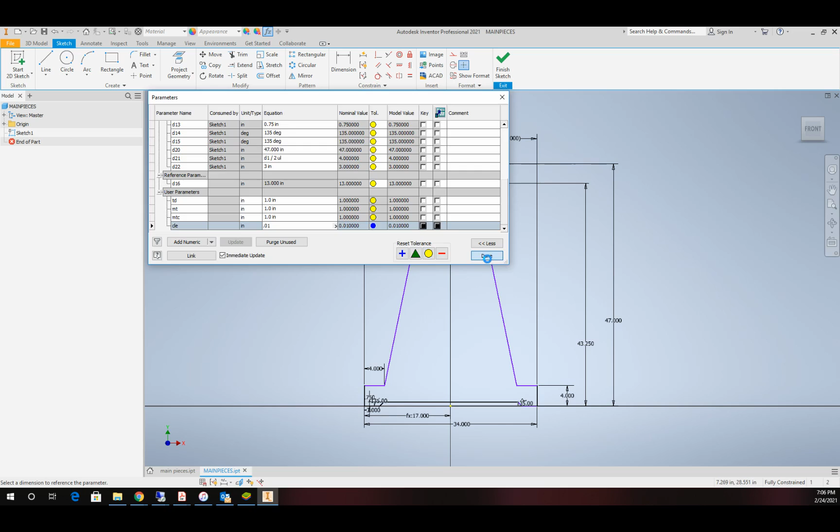I have the basic shape laid out here, and I'm going to try and keep this as quick as possible so we can see the payoff without wasting a lot of your time. So we'll do the back and the two sides, or something along those lines, and get ourselves going.

I have this fully constrained at this time, but I'm going to come in here and edit some of these. This is going to be a slot, so I'm going to call that MTC. And then I'm going to call this 2 minus CLE, since I know I'm going to have 2 inches on each side... actually, I take that back — no, we'll go ahead and do that. Then I'm going to take this, which is my slot, and set it at 4 plus CLE, and since we want two of those, we're going to go 4 plus 2 times CLE.

All right, so now it should be equal. I can double check by throwing another dimension on here just to confirm it looks the same, and it says it's a driven dimension and they match, so that is good. So now this slot is in perfect shape for where I want it to be at.

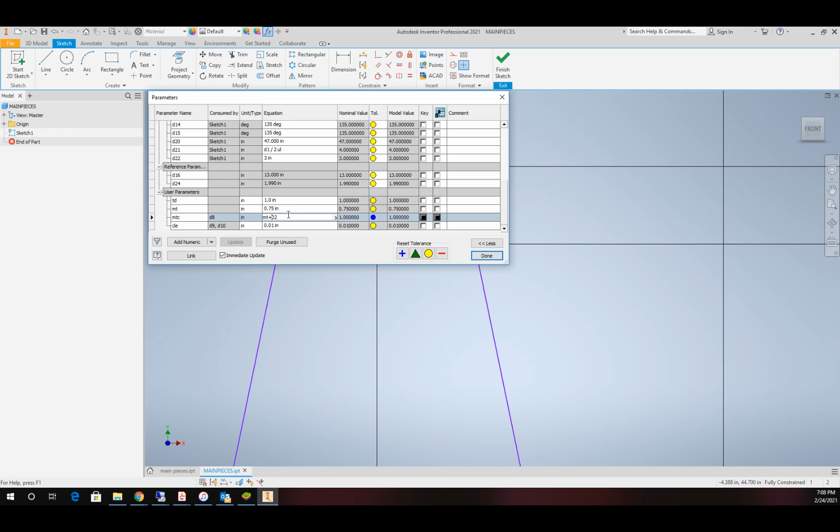All right, so that's better. Everything looks right now. Okay, so now I've got my first piece made, and I'll add some more features to this. As always, we want to try and keep our sketches as simple as possible and just have more sketches.

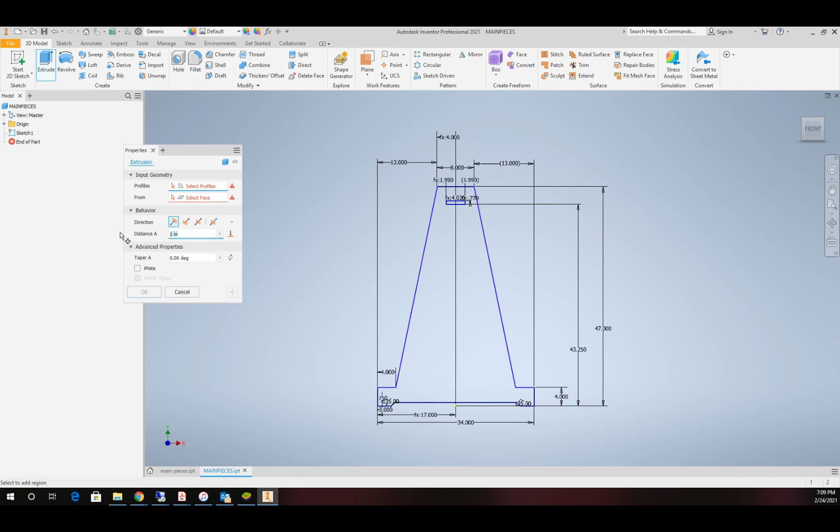So we'll go ahead and finish that up, and then we'll extrude it at material thickness. From there, I need to add a few other features in here, so I'm going to start another sketch on here, and on this sketch I'm going to go ahead and draw some rectangles in.

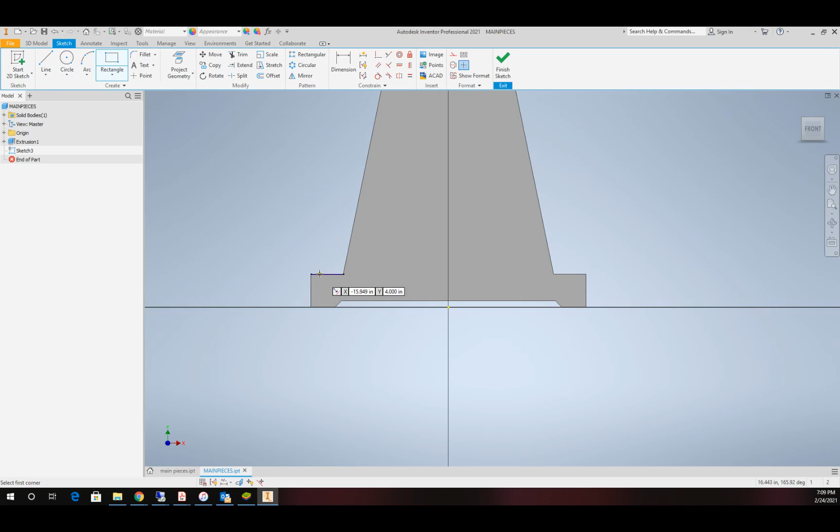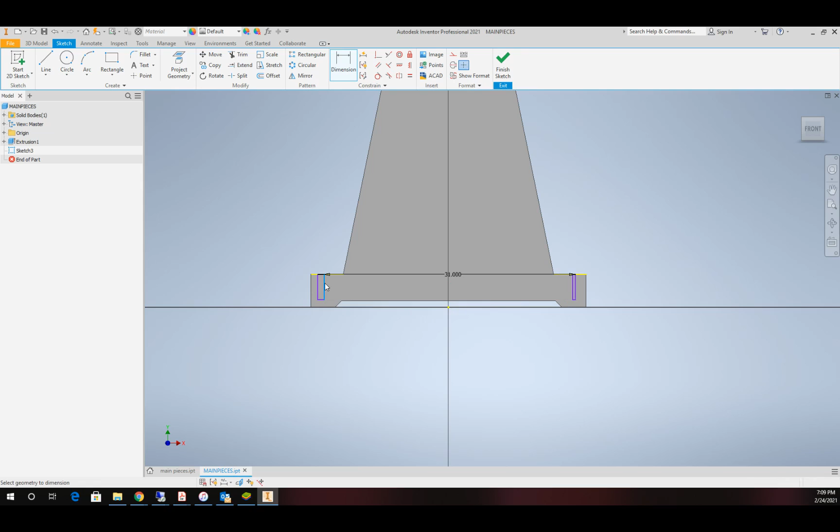And I'm going to make those equal to each other, so I only have to put dimension on one side. I'm going to place the dimension across, and that's going to be equal to 31 inches. Then I'm going to put one from here to the center, and we'll split the difference. Okay, that takes care of that.

This is a little wonky. Let's fix that. Okay, all right, and we'll just go ahead and set this equal to this. All right, and then we'll set a dimension here for our depth.

This one I don't need to get too sophisticated with, so it'll be 2. And then I'm going to place a dimension across it, and rather than using a number, I'll call it MTC, material thickness plus clearance. That should update that one as well.

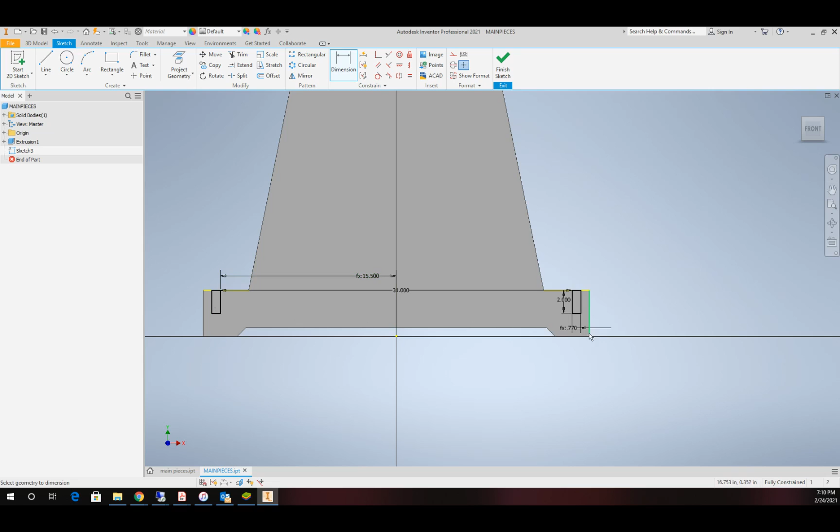All right, so we've taken care of the notches in there. We'll finish that off, and we'll extrude those as a cut. Like so, and now we have our notches cut to take the side pieces.

We'll add more geometry in here, but to keep this thing moving along, I probably won't finish it all for you. I may take a break and come back and show you it all finished up, but I want to make sure I get all these features covered.

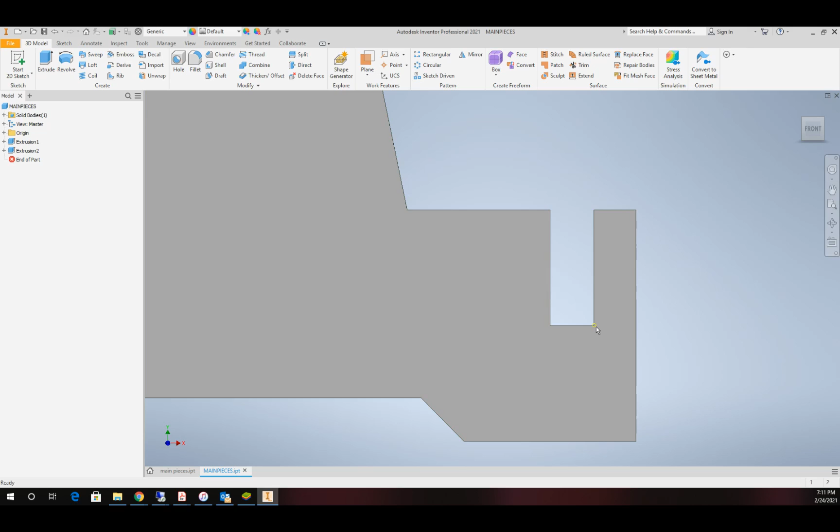Let's go ahead and add in - when we take a router bit or any cutter, we need to take into consideration we can't make a square corner. So we have an issue down here, so I'm going to start another sketch.

Now normally I do all these in a single sketch on all of my holes, so we'll just do the set that we have. So I'll start a sketch up there. I'm going to draw a circle, and I'm going to give it a diameter of TD, our tool diameter.

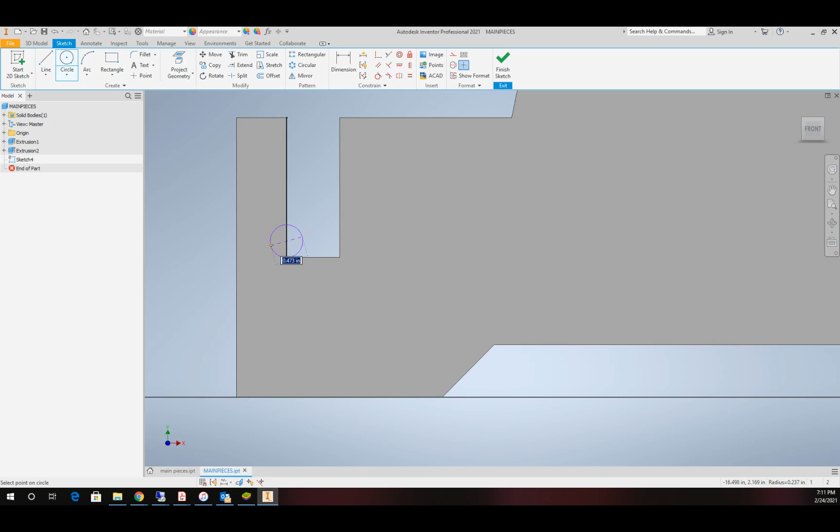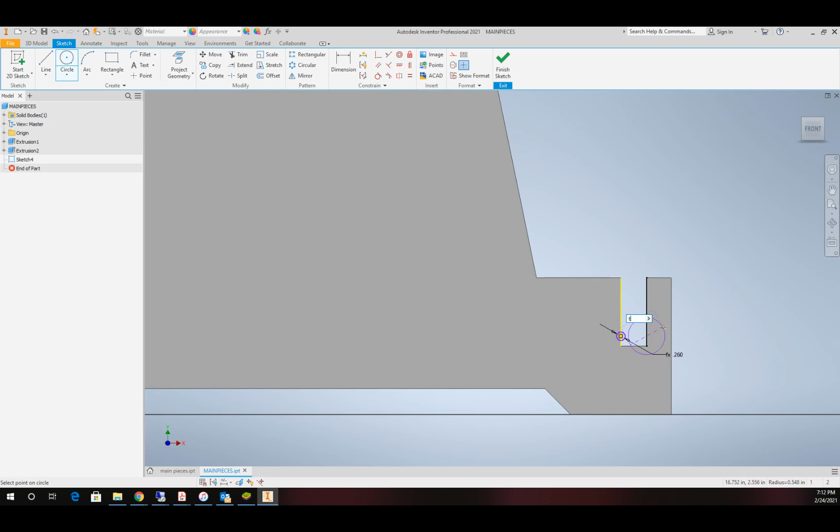That's too big, so I must have messed that one up. And it is - it's set to 1, so let's update that to 0.6. Okay, fixed, and we'll continue doing that. So TD, and TD. And we'll do this one up here as well. Let's see, we're going to go up with that.

All right, and then what I do is I use a tangent constraint to lock it in. If it doesn't turn black, then I need to go ahead and add coincident on here. I missed it when I created it. Okay, down here at the bottom.

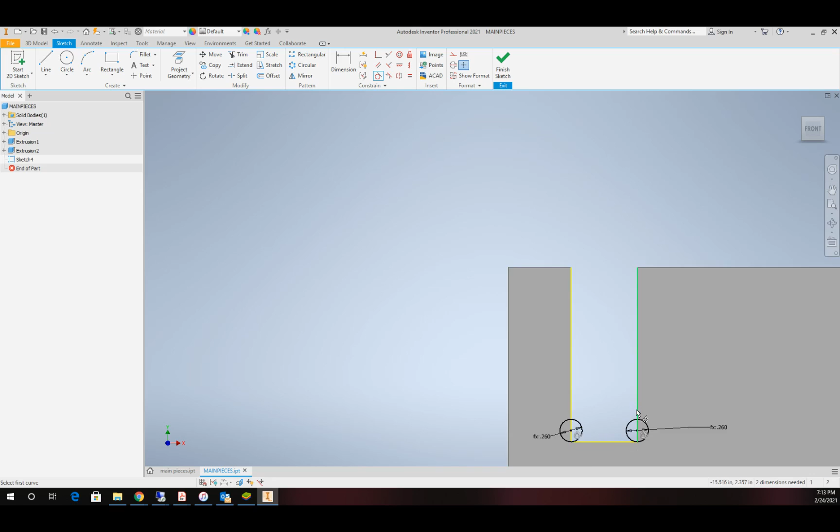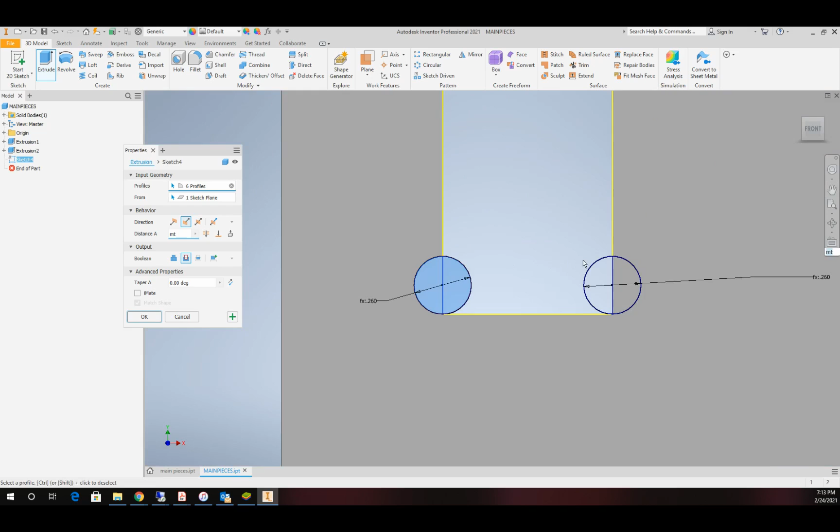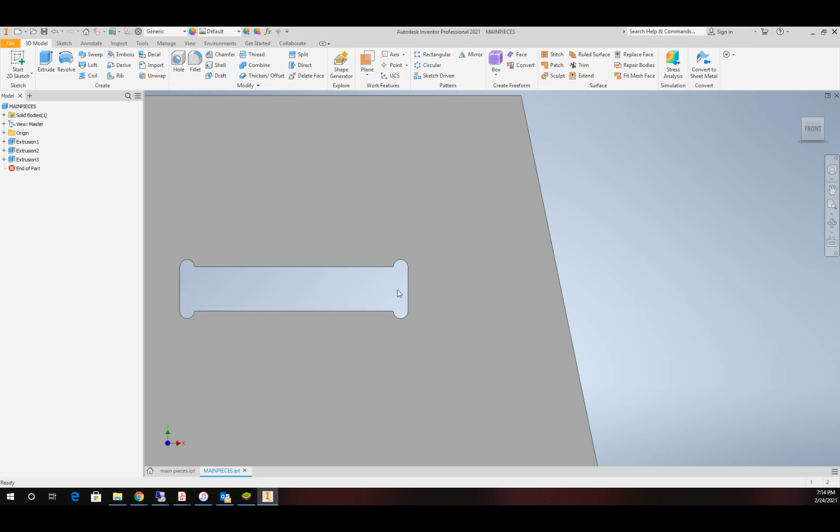All right, looks good. We'll finish that sketch off, and we'll extrude that as a cut feature. Okay, and there is our notch so that we will get a rectangle in here. So we're over exaggerating our cut to take that, and so now our piece will slide in there and in these pieces over here.

All right, so I would continue to work this piece. There's more I need to do. It's going to be adjustable, so I'm going to have this slot all the way down. I'm going to do some other cutouts in here to take material away, but it's going to be the back of this shelf unit for me.

But the next thing I want to do is create my sides, and I want to do them in the same part file here so I can use the existing geometry. I don't have to duplicate that, but I ultimately want to get this into an assembly.

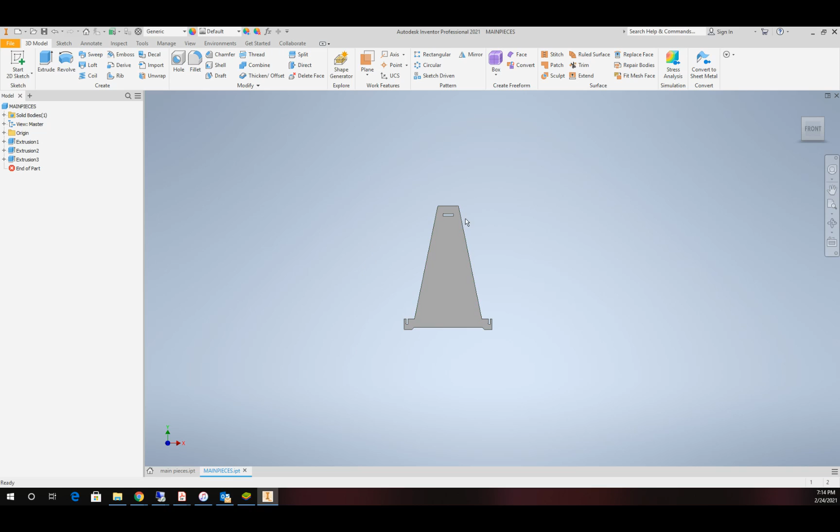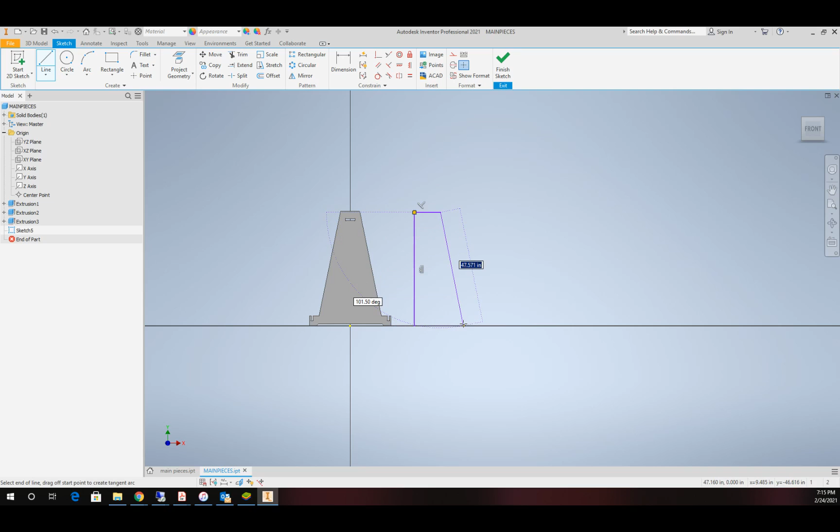So we'll use a little trick to do that. We're going to start a new sketch, and place it back on the same plane that we started the first one with. I'm going to go ahead and draw a line up here, come on over a little bit, down on the angle, and then back.

So I don't have to worry about changing the height. I'm going to use a collinear between this piece and this piece, and a collinear on the bottom.

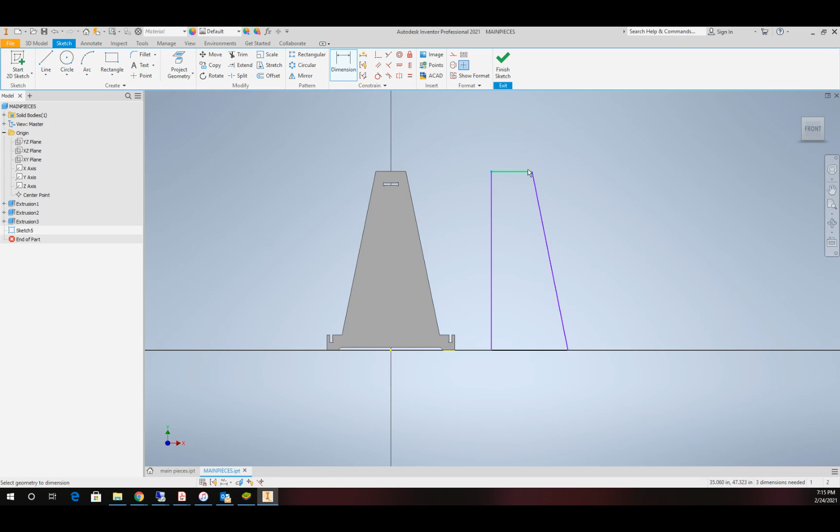So now I've already established my height, so they'll match for me. Then I'm going to establish a dimension from here, and I'm not exactly sure where I'm going to go with this, so we'll try 9 to start, and we'll try 12 for down here. Let's go bigger than that, try 14. There will be adjustments made - I haven't really worked this design fully out yet.

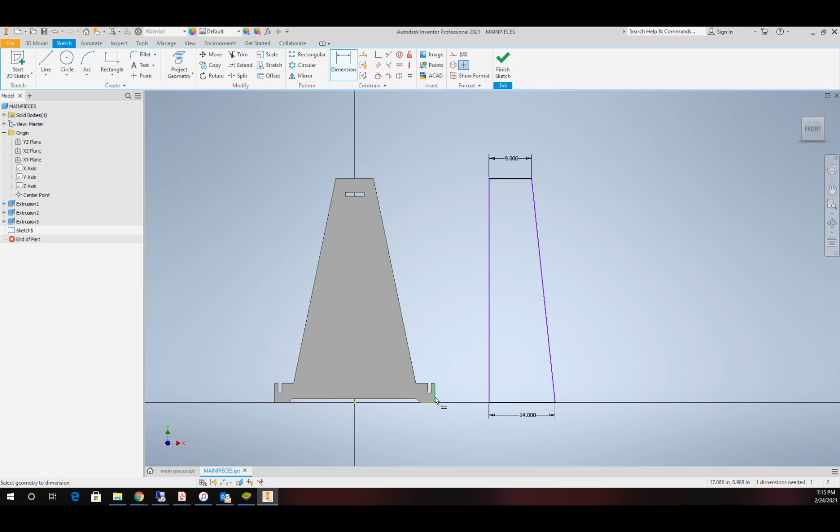And then we'll go ahead and place a dimension to locate it. It really doesn't matter right now, so we'll just set 24. So now I have a fully constrained sketch, and we're kind of ready to go with that.

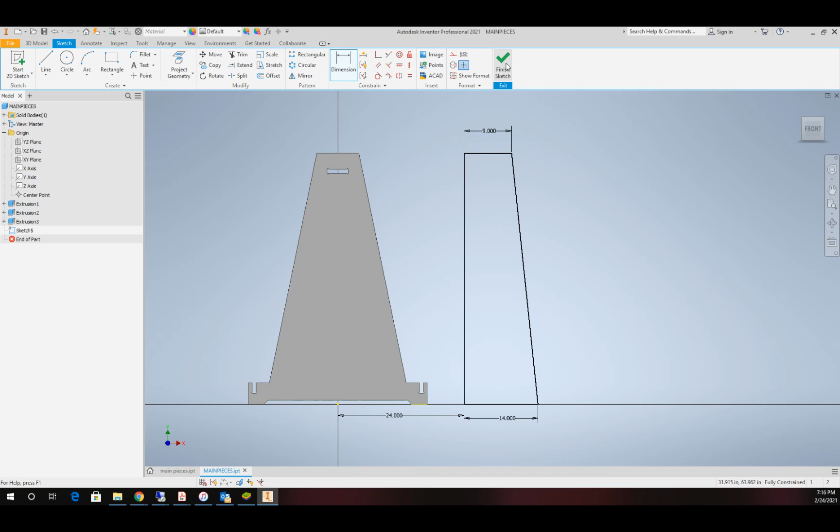So I'm going to finish that sketch off. We'll add some more into it. And now when I go ahead and extrude it, the secret to this is I want to pick this option, New Solid. I'll click OK to Material Thickness New Solid. Now I should see that I have a new solid up here on the top that will be useful.

I can keep working on it, so let's go ahead and add this little notch on the opposite side. So let's deal with that. We'll start a sketch, and I need a rectangle over here.

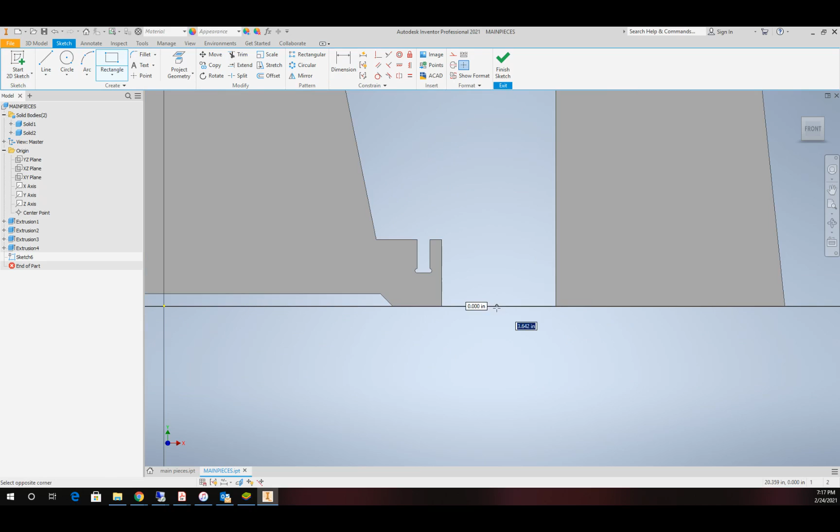We'll collinear this and this, and we'll set a distance off the back, 2 inches.

Then I'm going to drop a rectangle in. Oh, we gotta come in from the bottom on this one. All right, I got a purple line down there, so that's not in line.

There we go. Dimension for this is going to be MTC. And then set that to MT. Let's get rid of that 2. Set another dimension here to MT. Okay, so I got an MT, MTC, and an MT that will make the dimensions for this.

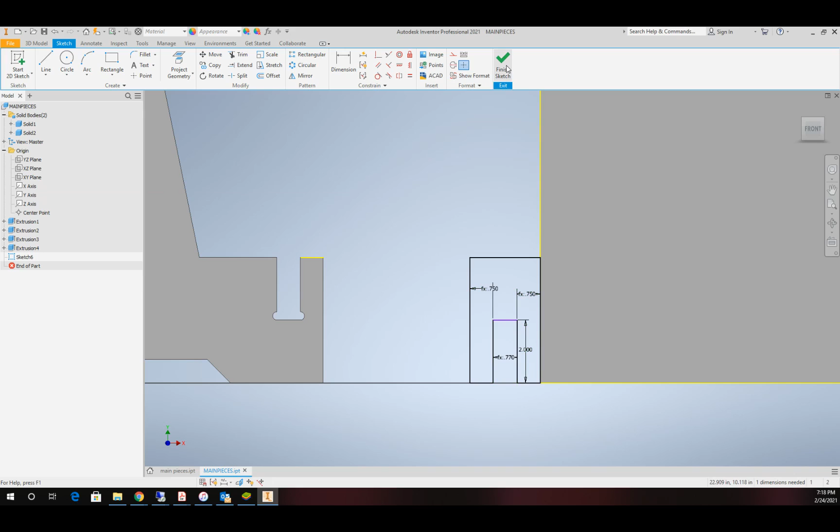Now I got to go ahead and establish my 2 inches. Let's trim up there. All right, that should take care of it. Finish that off

And extrude it. Now here's another secret to it. I need to make sure I watch what I'm doing with this, that it's joining to the right solid, especially on subtraction options. But since this is a union, let's see, it found one. I think it's that, but I'm just going to double check.

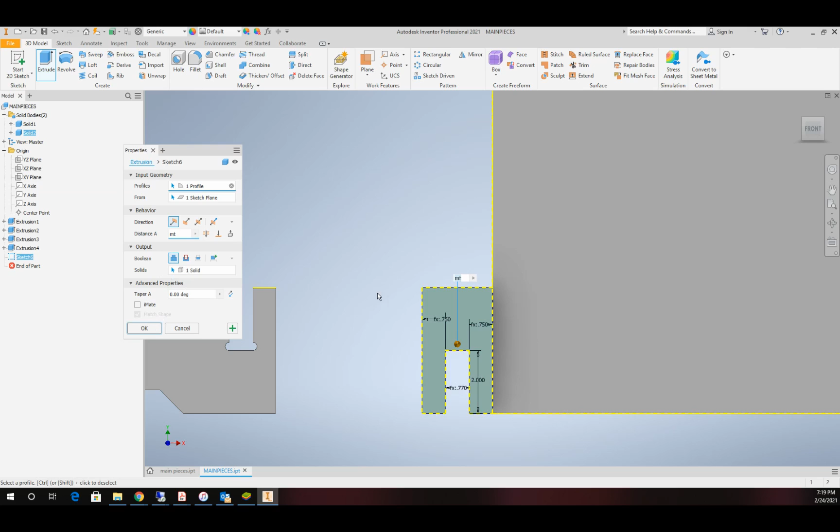Here's my solid. I'll cross that out and pick the solid I wish to join it with. And it's set to material thickness. Let's make sure it's in the right spot. It's going the wrong way. All right, and there's our piece added on.

Then we can go ahead and carry that geometry across and establish where our slot's going to be at with this piece here. So we would start another sketch and we'll draw a rectangle.

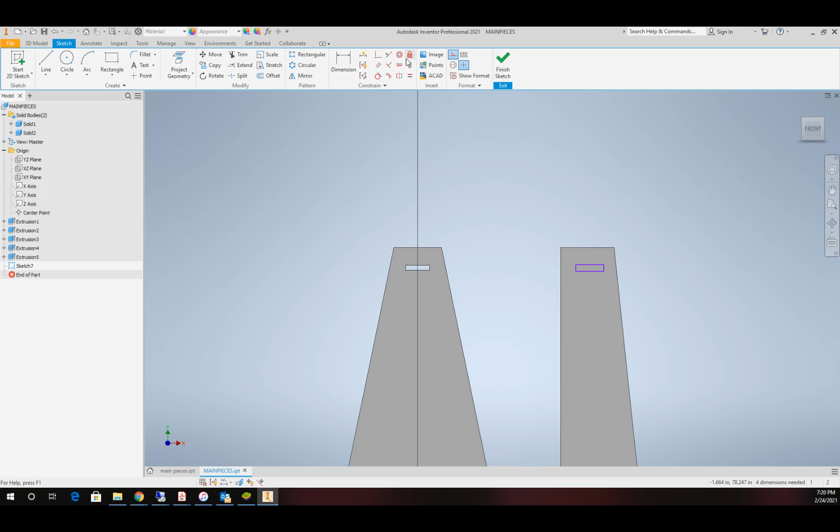Oops, wrong button. Use collinear. Now I don't even have to worry about the dimension. It's only in one spot.

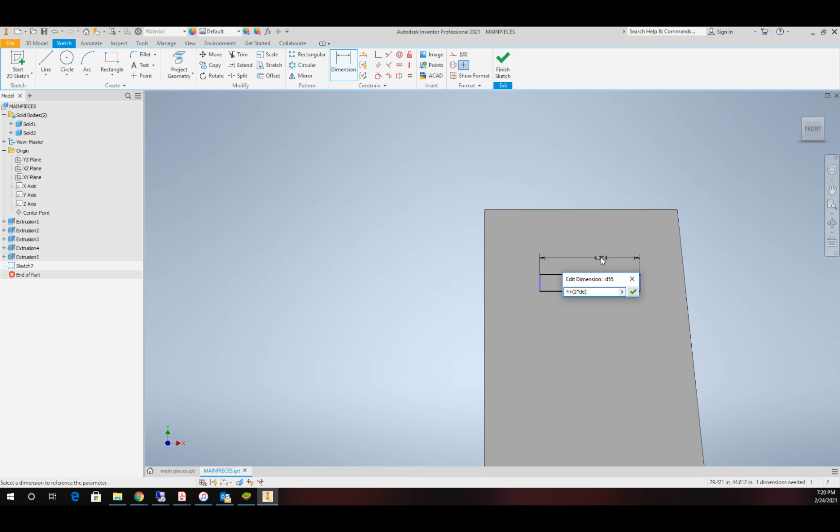I'll set this to 4, same as the other one, plus 2 times CLE. And I really don't know where it's going to go yet. I'll figure that out.

So we'll just set that to 4. And we'll go 4 minus CLE at the starting point. All right, we'll finish that up.

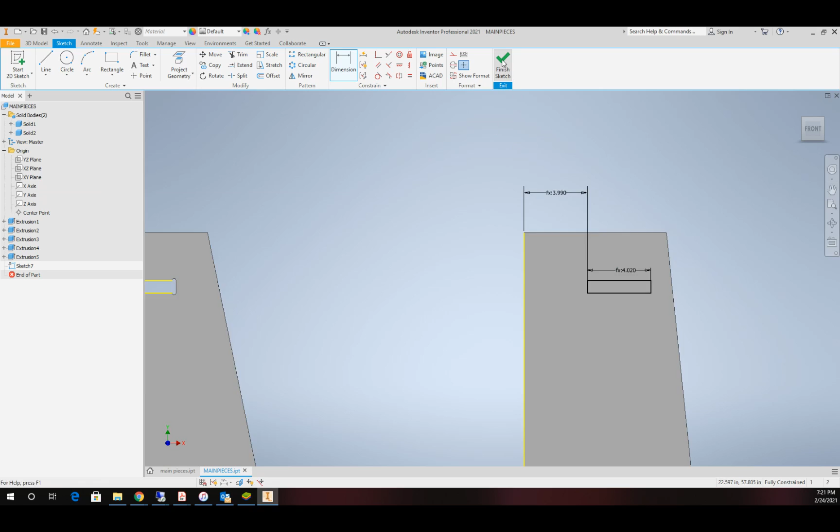And we're going to do an extrusion, a cut. So we'll switch to that. Notice how my solid is highlighted and it's picked here as one solid, so I'm doing it only to this piece. And I'll click OK to remove the material.

All right, and then I'd go ahead and add my tool diameter onto here and continue to work this sketch. Let's go ahead and add a third part, and that should be enough for me to kind of move over to the next piece.

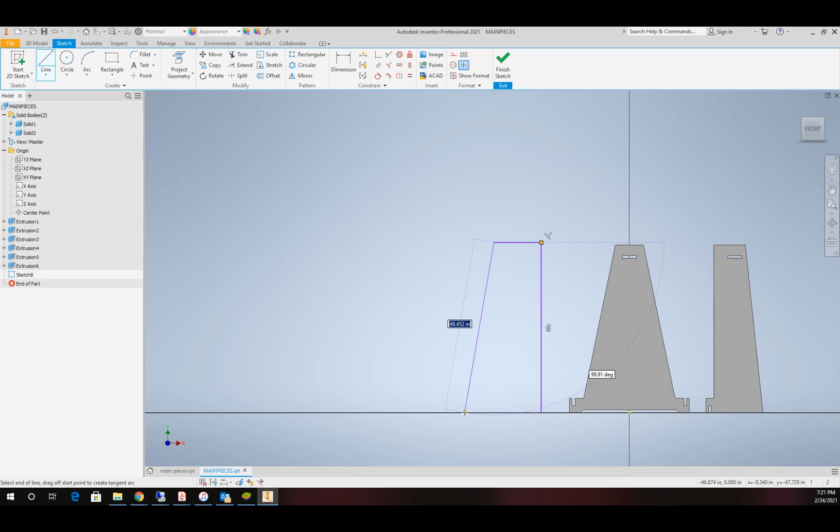So we'll go ahead and start a sketch again, same plane, and we'll kind of duplicate what we did over there. We'll start with a line coming on up, over a little bit, down on an angle, and back. And let's go ahead and draw in the rectangle now and take care of that rather than a separate sketch.

Okay, let's set some measurements up. Collinear across here to here, here to here, here to here. Okay, and that takes care of that. I don't even remember what our measurements were, so I think it was 9.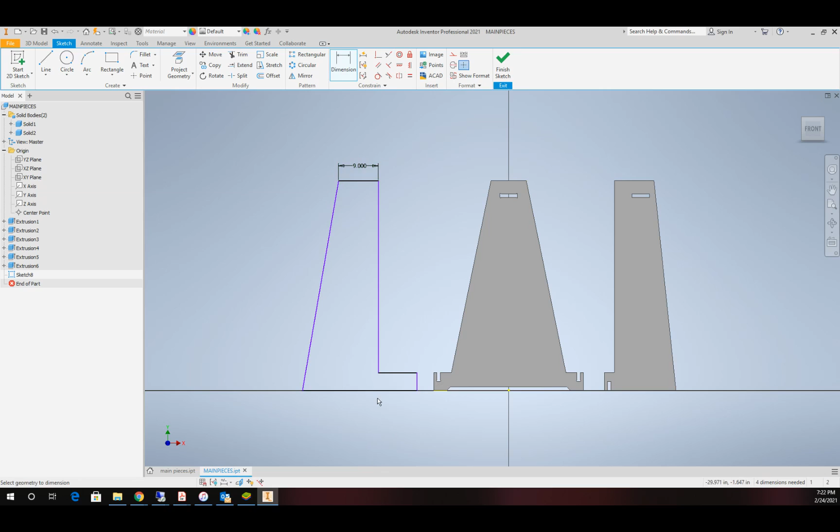And it was 12. And this was, oh, that's right, we didn't use a measurement there. So let's go ahead and draw that in.

So our height on this should be 2. Okay, we need another collinear. There we go. Let's establish distance to the center.

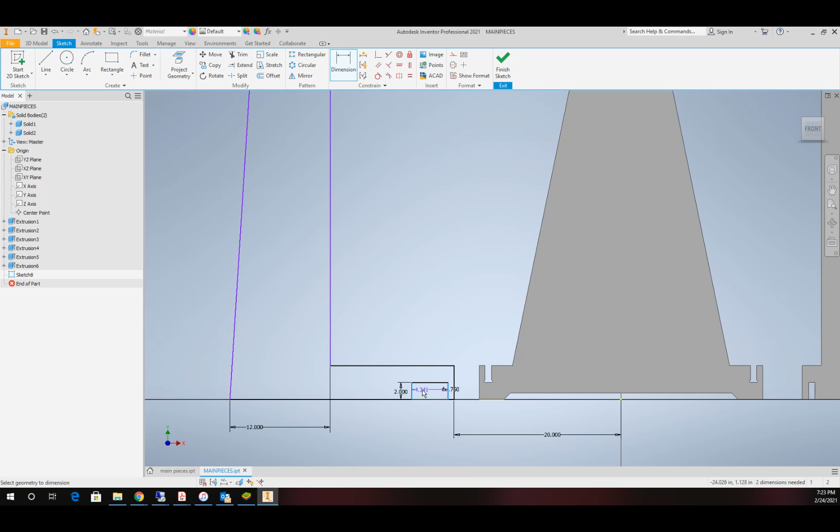Okay, doing good. Now we did a measurement here, should be material thickness. From here to here should be material thickness with clearance, MTC. And from here to here should be material thickness.

All right, fully constrained. Let's go ahead and bring that slot over since it's not that sophisticated. So collinear. Okay. Don't like it when it does that, but that's all right. Work through it.

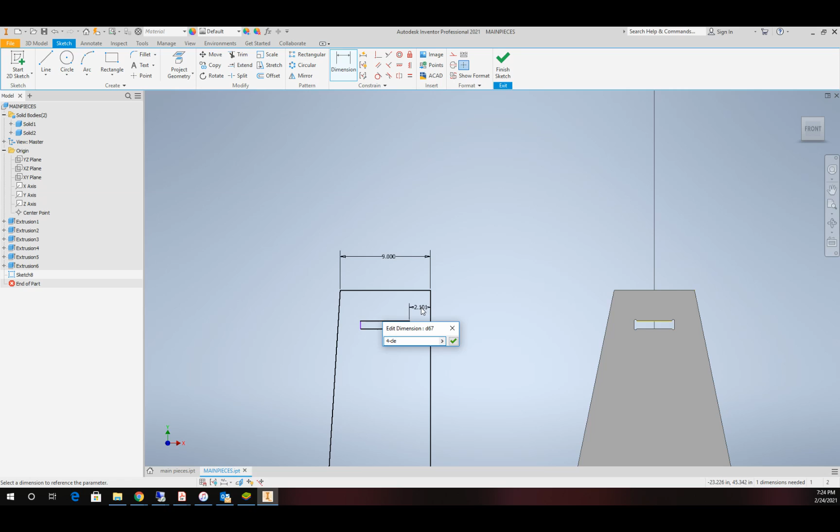All right, and then we'll set a dimension from here to here, was 4, minus CLE. And then 4 plus 2 times CLE. All right.

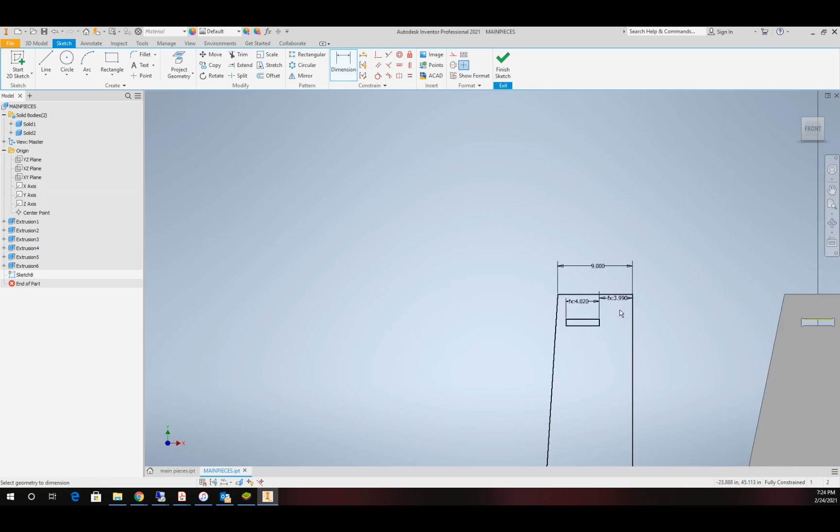That should be good. Everything's just finished. We'll finish it and we'll extrude it as its own solid. Pick it. It's good. And click OK.

There's our third solid. All right, so I would continue to work this and get it all done, but I'll do that in the background so you don't have to watch me work my way all the way through. I'll show you the finished product when we get it all done.

But let's go ahead and establish our assembly model from here. So this is fairly easy as long as we have our solids. And the great thing about it is we keep the adaptability. So we can keep editing and working on our parts while the assembly updates for us. So we're not losing any functionality. So we're using each of the parts to help us in a single part file.

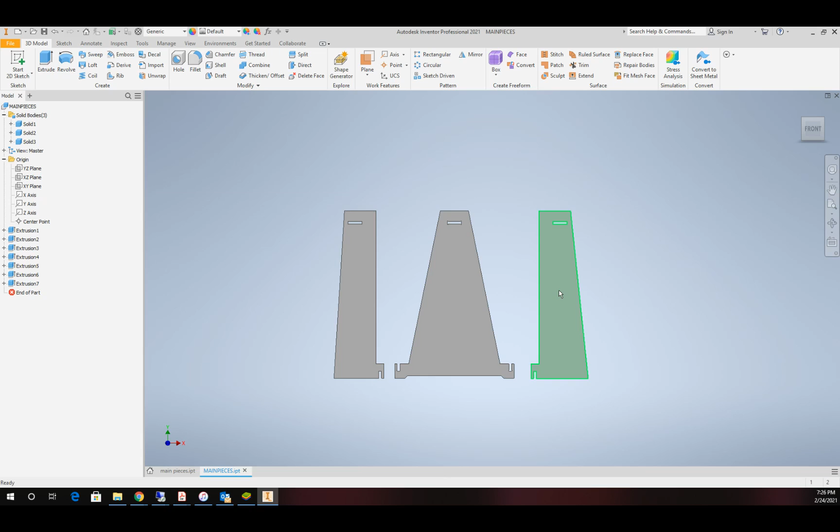We'll have our own separate part files out there, and we'll have a fully adaptable assembly to boot. So we have kind of the holy grail here on everything that we could look for or want in creating some of these designs.

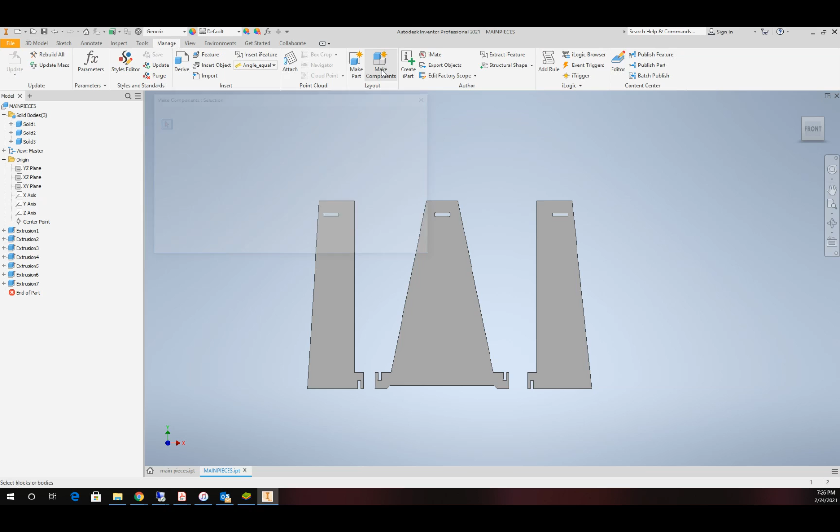All right, in order to do that, I'm going to come up to the Manage bar at the top. And where it says Make Components, I'm going to pick that. And I'm going to select my 3 solids.

Now, if I was to come back at a later time and add some additional solids from here, then I wouldn't insert into a target assembly. I only want to do this one time. So after this time, and when you see the finished product, I will be adding a few additional solids to that, but I will do that without doing this step right here.

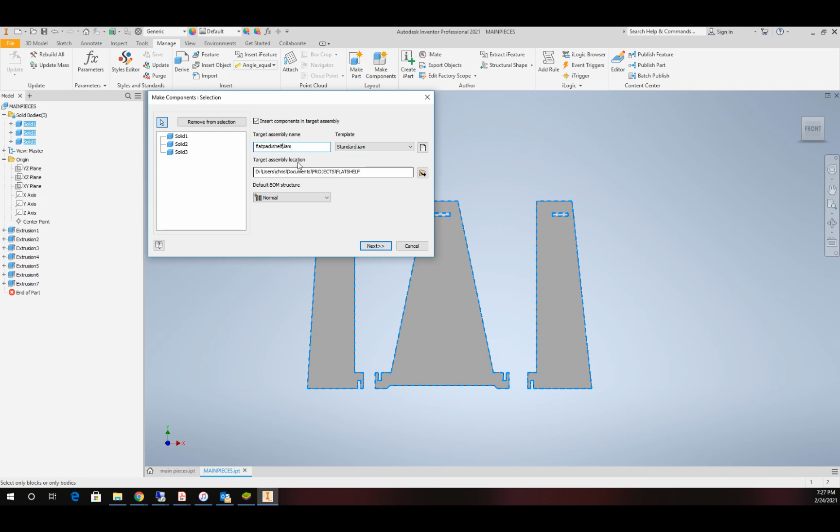But the first time we'll go ahead and do that. We're going to insert them into a target assembly. I want to make sure my target assembly is in the right directory, which it is. And I'm going to give it a name, and it's going to be Flat Pack Shelf. Okay, and I'm going to hit Next.

And then for my solids, I'm going to rename them so they make some kind of sense. So this one's my back. And this one's my right side and my left side. Okay, we want to make sure we can change where they go, but that should be in the same folder that everything is located. And we'll go ahead and click OK.

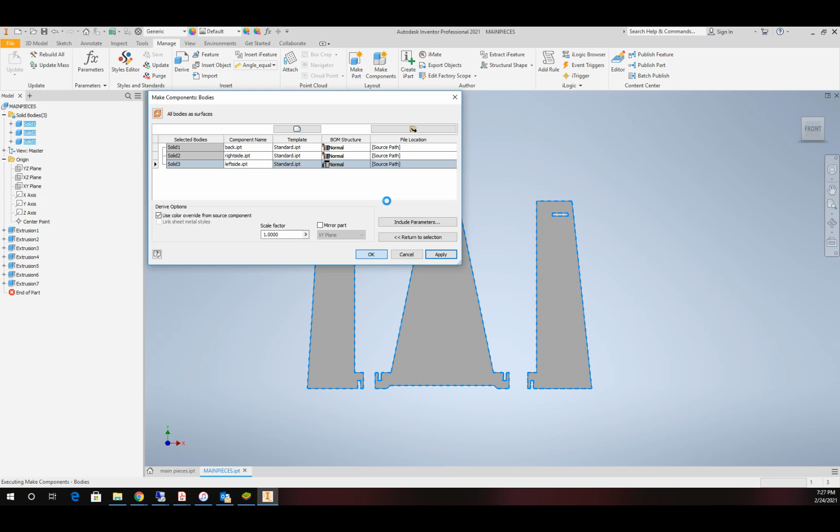Okay, so right now it's going to go ahead and create an assembly and go ahead and make the part files. So as soon as I get over to my assembly, I'm going to do a save. This is going to create that initial save of the part files. So we'll click OK.

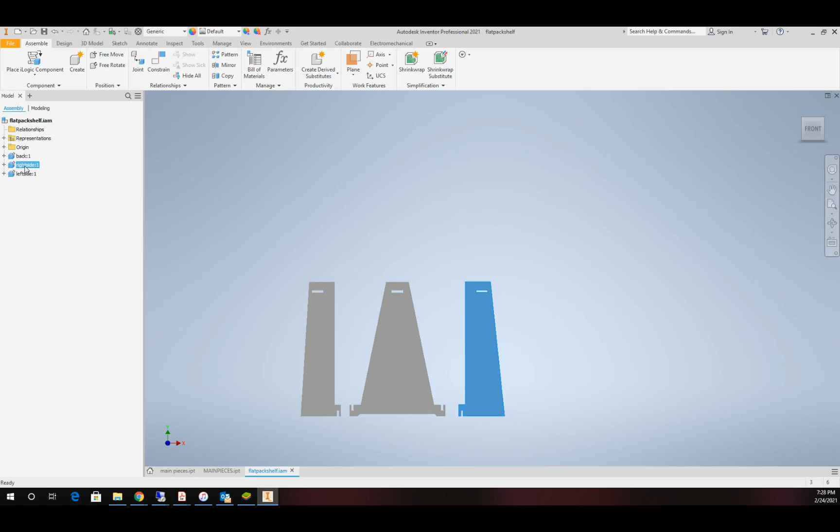And the only drawback to this is when they bring it into our assembly, it brings them in grounded. So I'm going to go ahead and I'll leave my back grounded, but I'm going to take the two side pieces and unground them. All right, so these now have freedom.

And now we'll go ahead and make this up so that we have this. So on that side to here.

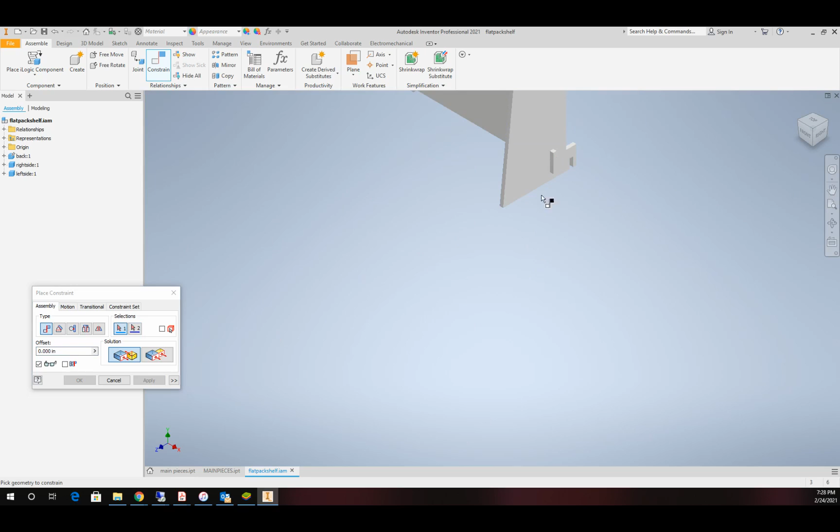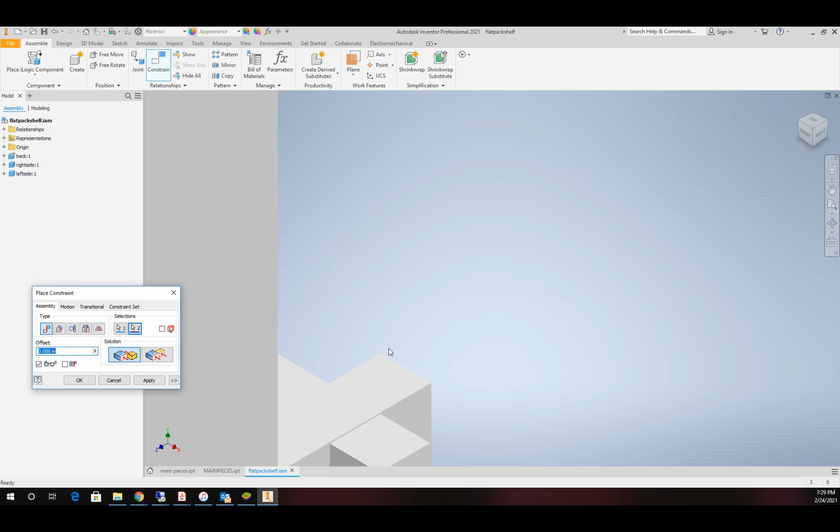Okay, just some quick little mates. Let's get this working. All right, one side done. Constrain.

I love the select other feature for doing this as quickly as possible. All right, one more mate.

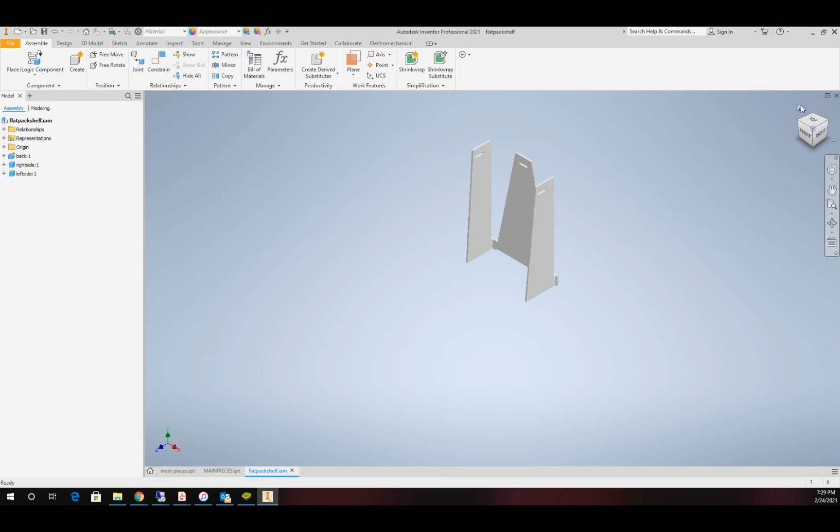And there we go. Now we have ourselves an assembly that is adaptable and editable. So let's go ahead and see that real quick, and then I'll take a little break and finish this up in the background.

So back to my main pieces here. We're going to go ahead and add in just an array feature right here real quick.

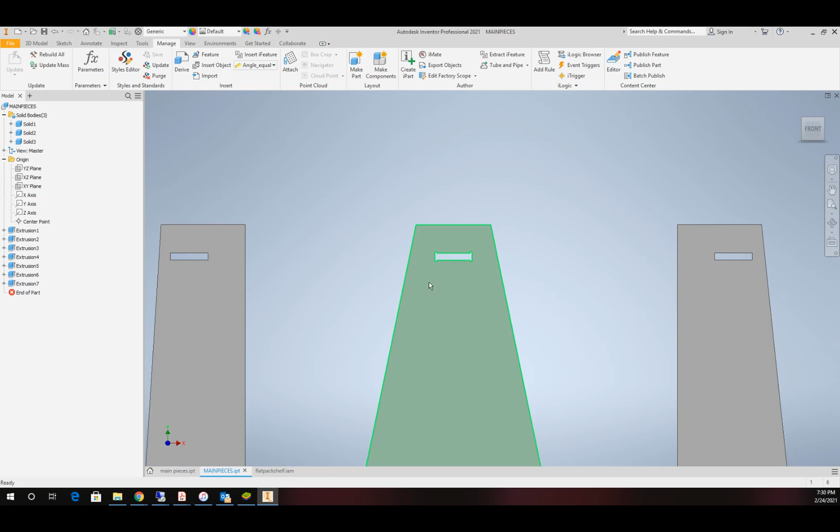All right, so since I did this in that original part file, I have to make a new one real quick.

So I'll start a sketch here, and we'll draw a rectangle in real quick. Okay, and we're going to align this up here to here.

I don't even have to worry about my measurements. All right, we'll set this dimension to...

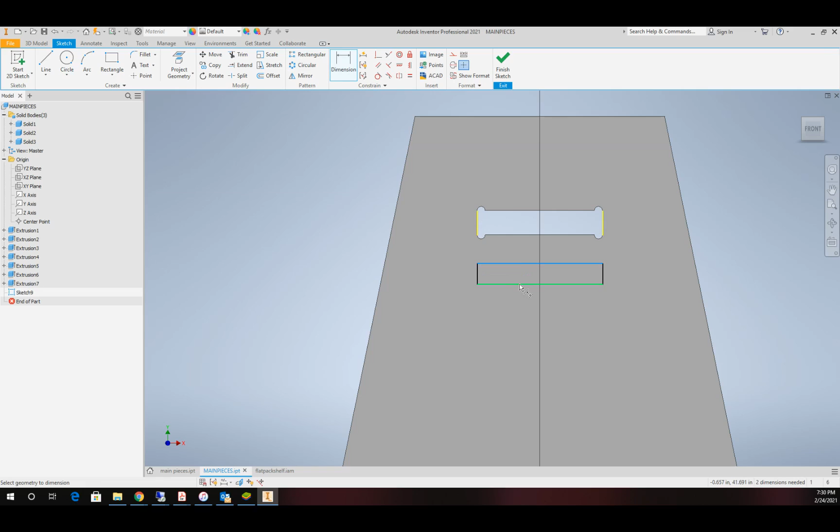MTC. And I need to establish a distance from here to here, which is going to be 2 minus CLE. All right, that's perfect.

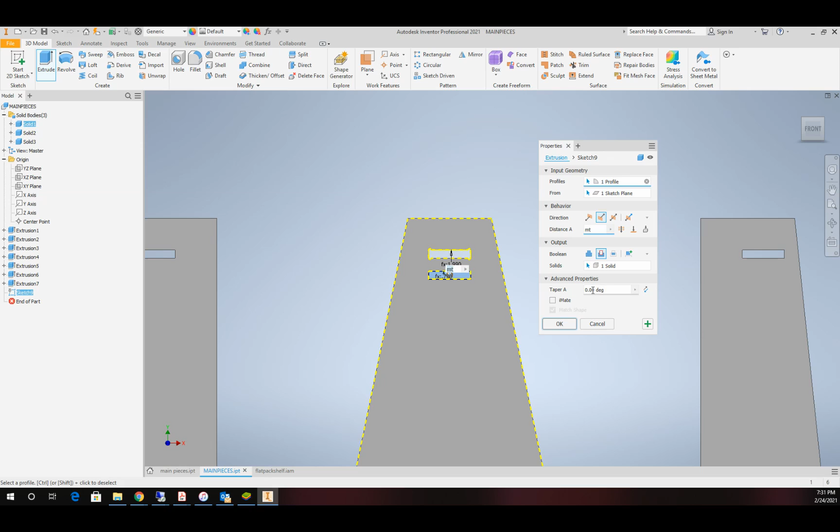Finish that, we'll extrude it as a cut. Make sure the solid is right. It is. Click OK.

And let's go ahead and add another sketch in here real quickly. So, tool diameter.

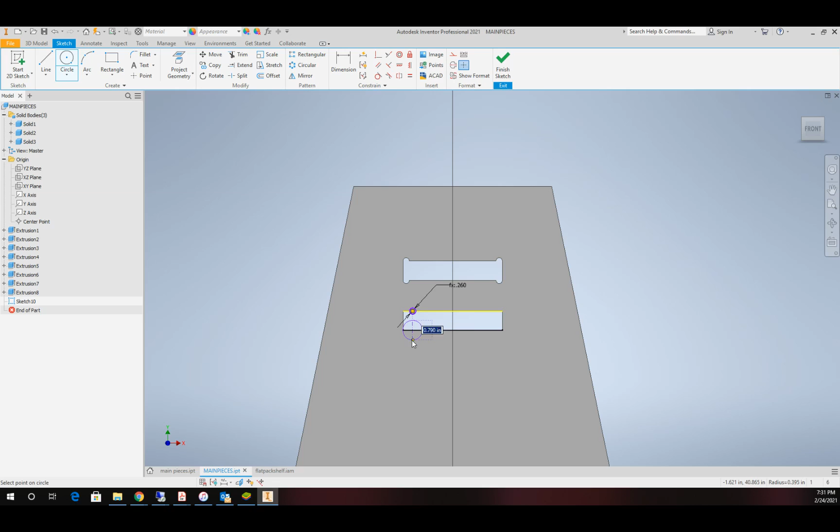Okay, couple of constraints, and we're done.

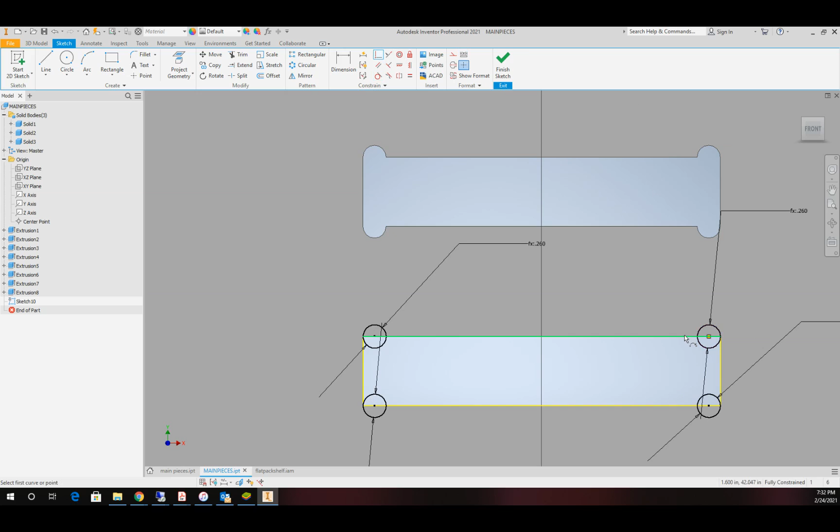One needs an extra one. Okay, good. And extrude cut on that.

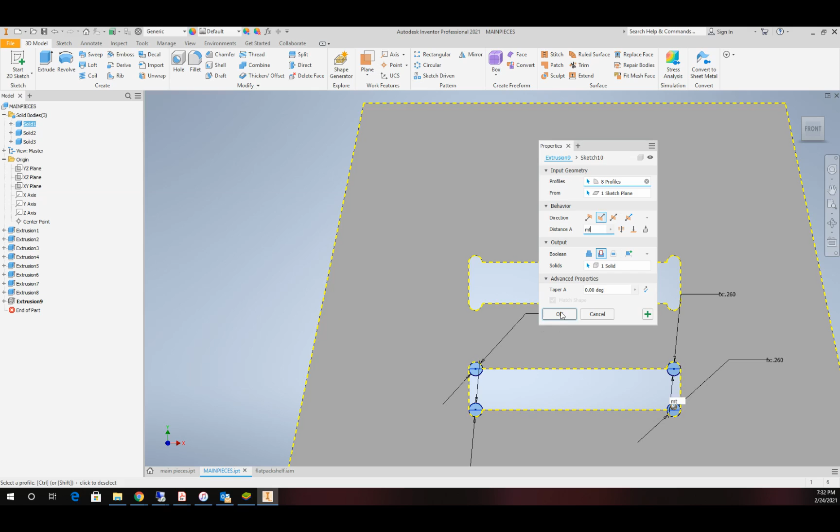Okay, something happened on that, so let's see what I did wrong. Oh, I picked something here. Okay, fixed up.

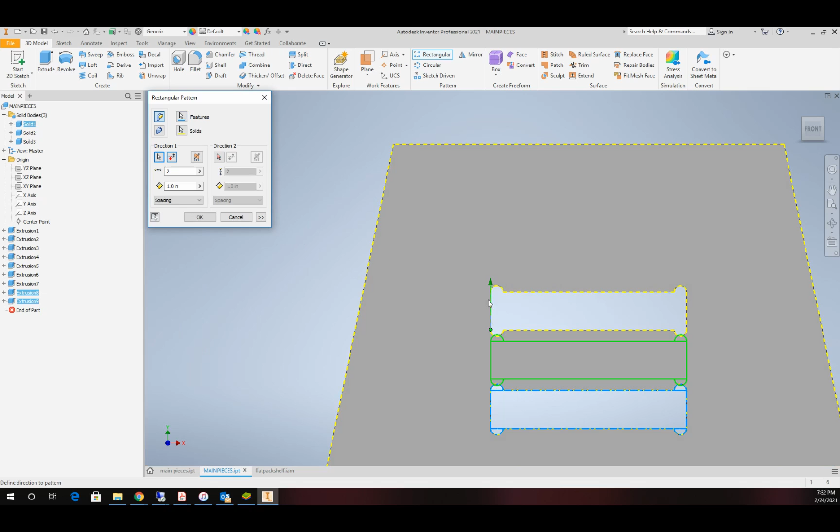Okay, direction, we'll establish down, flip it, and I don't know how many I need yet, so let's just say 10. Oops, 10 here.

And there we are. So we could probably add a few more, but I can edit that up and clean it up. So this will be where our shelves will fit in, and we'll bring that all the way down to the bottom.

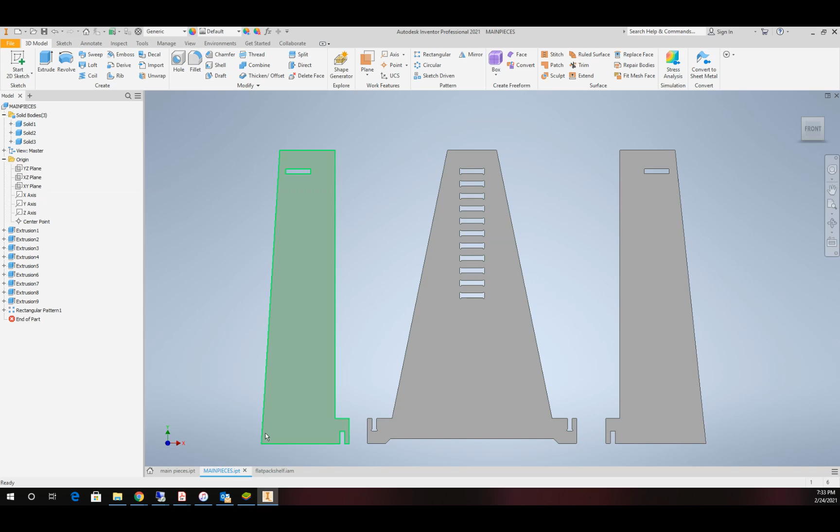So I'm still working in a single part file, but let's go take a look at what's going on in our assembly. Once I hit update assembly, notice that everything is still coming over from this piece here. So this is a great technique to work our way through, keep it simple, and make our changes as needed.

All right, I'm going to take a break here, and when I come back, I'll show you it all finished up and how the shelf will turn out.

All right, I'm back, and I've taken and edited this up a little bit and finished some things off. Our assembly is now looking like this with all of our parts.

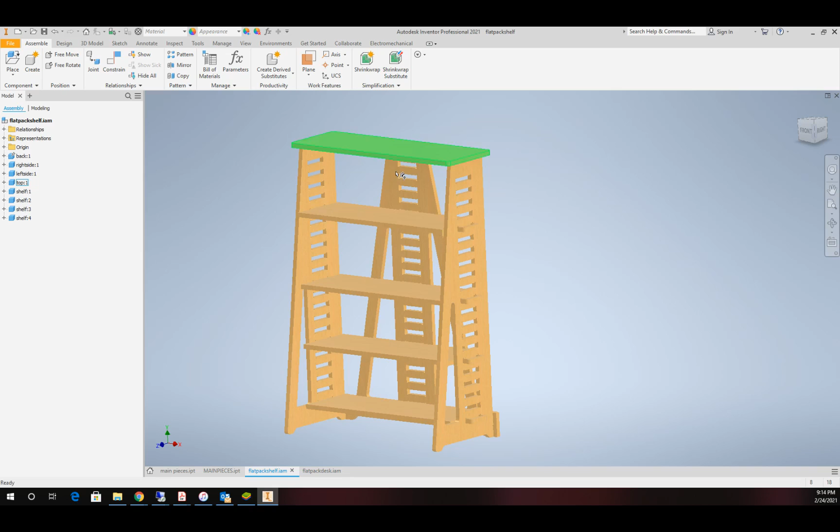I've added the top and the shelves. I've added some more details in here and cleaned some things up and got it.

I have one more part here to finish up, and I kind of wanted to show you that once you have your assembly made, you can still be working on that. So I come back to this and I have a sketch open, and this is kind of the secret to this whole system.

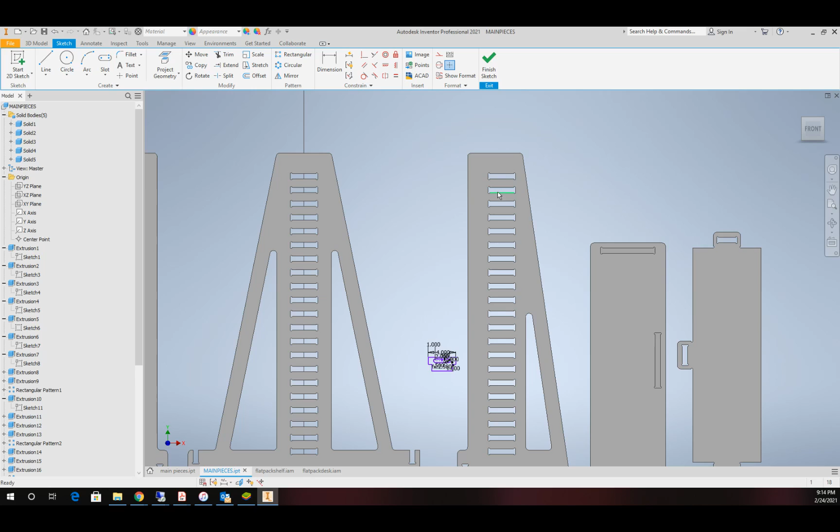This is the piece that will lock in everything in the grooves right in here and lock it in. So I have set my thickness, or my variable of material thickness, as the dimension from here to here. And then I have my material thickness plus clearance for the gap.

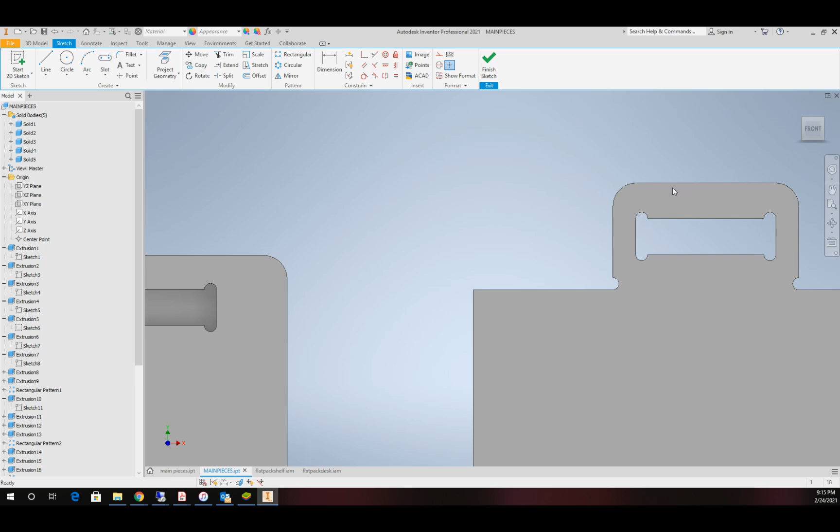And then I have another material thickness from this dimension to get to there, and I have my clearances all built in with those variables. So we're all kind of set.

So this is my last part, last sketch here. You can see I have quite a few sketches to make this, and we'll finish that off. I have all the dimensions set on it.

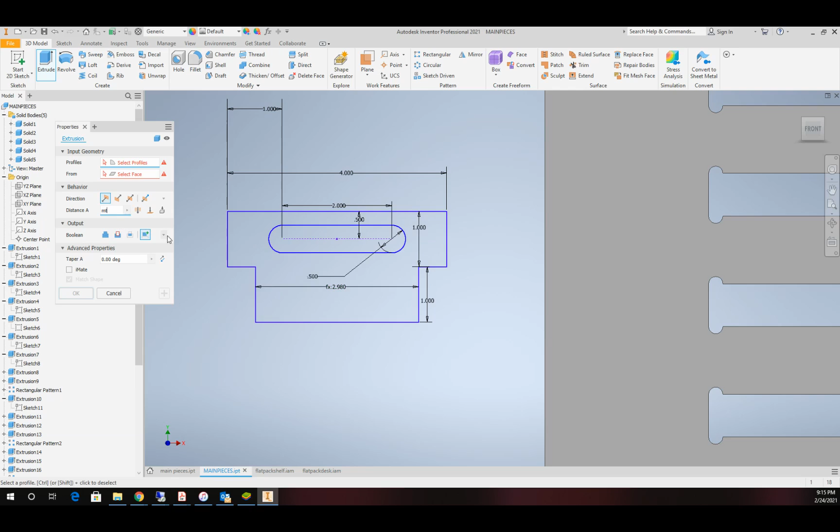And then I'm going to go ahead and extrude it just so we get some more practice, and we'll do it as its own separate piece for material thickness. Pick it, and we should have a new solid, which is solid number 6.

I've got a couple things to finish on it before we move it on over, so I just create another sketch. And the only thing I really have to do is throw some arcs in here at tool diameter.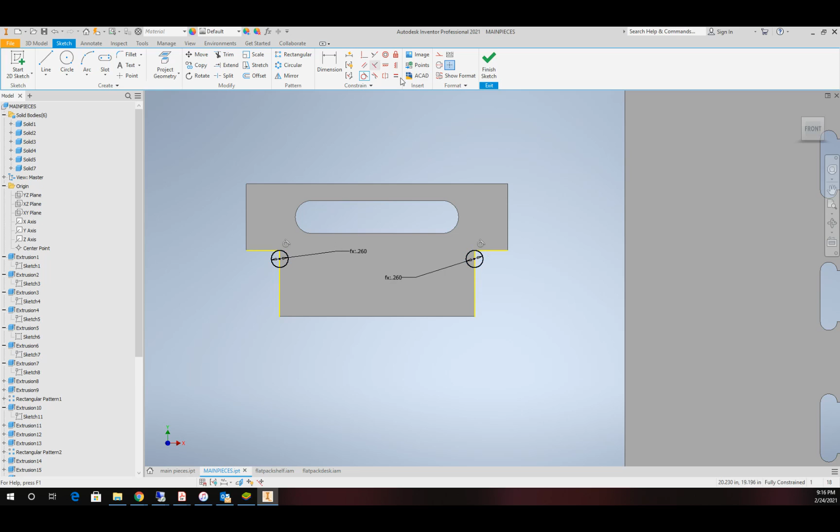Add a few constraints. Okay, and then black, so that's good. We'll finish that up, and we'll extrude them as a subtraction. Make sure our solid is picked. I don't see it. There it is. Well, I got two. All right, pick them.

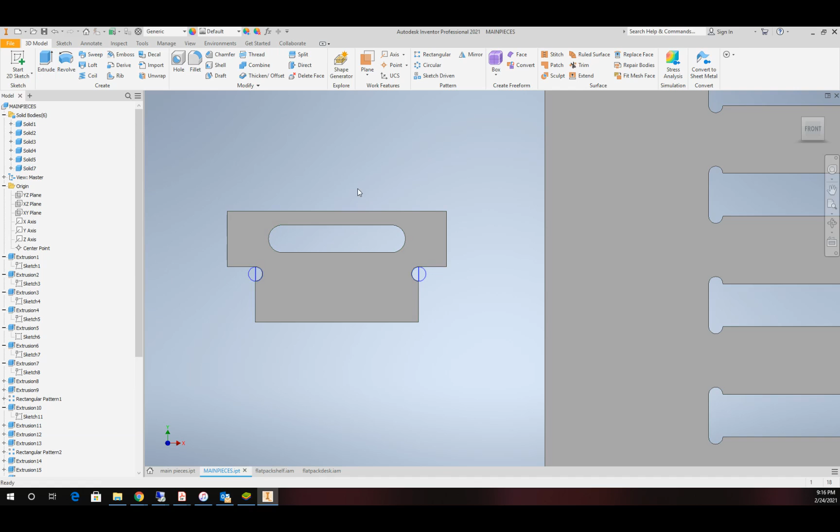Okay, so one last thing, we'll round. Use a fillet with a half-inch radius up here and here. Okay, so that part is done. Now I could keep going, adding more parts or changes, editing. Remember, everything will follow me all the way through, which is good.

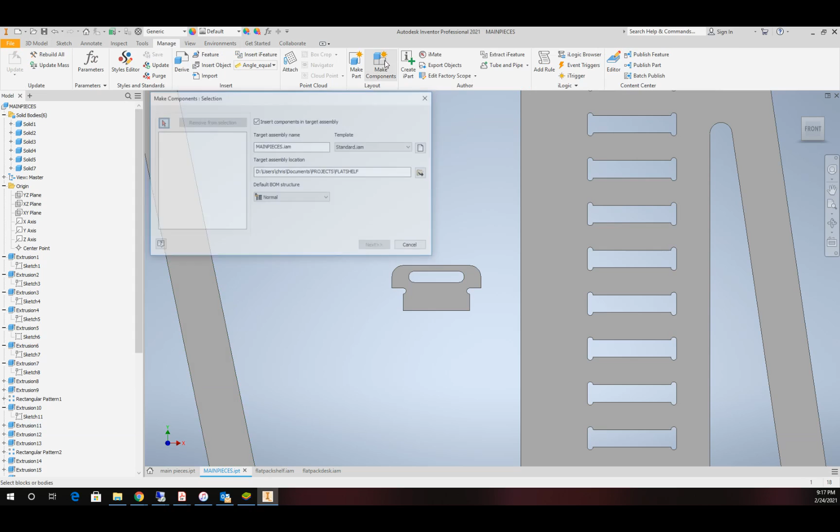What I'll do now is get my solid out and over into my assembly. That's fairly simple—I'll go back to Manage, Make Components. I'm going to pick that solid, unclick, make a new target, and give this a name like pin or connector, something that makes sense. And I'll click OK.

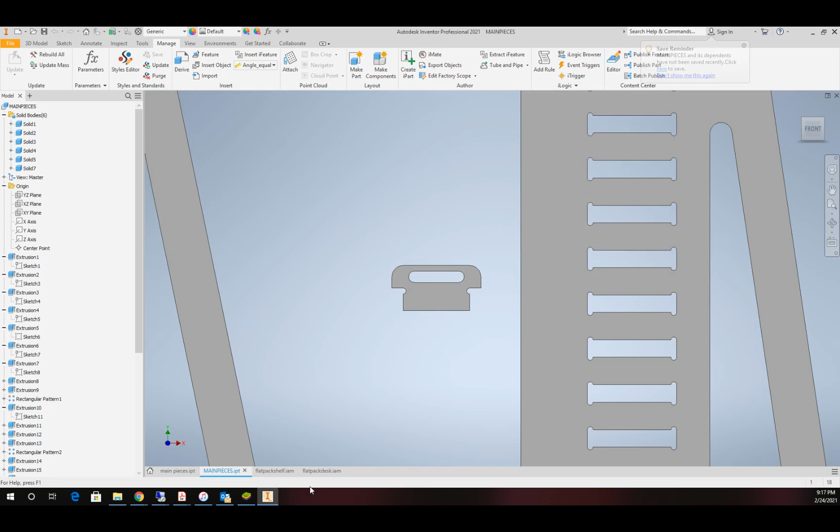Okay, and then we'll go over to our assembly and just place that in like we would anything else. So there it is. I can put a couple in, and then I would go ahead and use my proper mates to get that interlocked in there. So that is my assembly and the editability of it.

This is a neat little design. You can make it your own to get it done. I'll show you one last thing here.

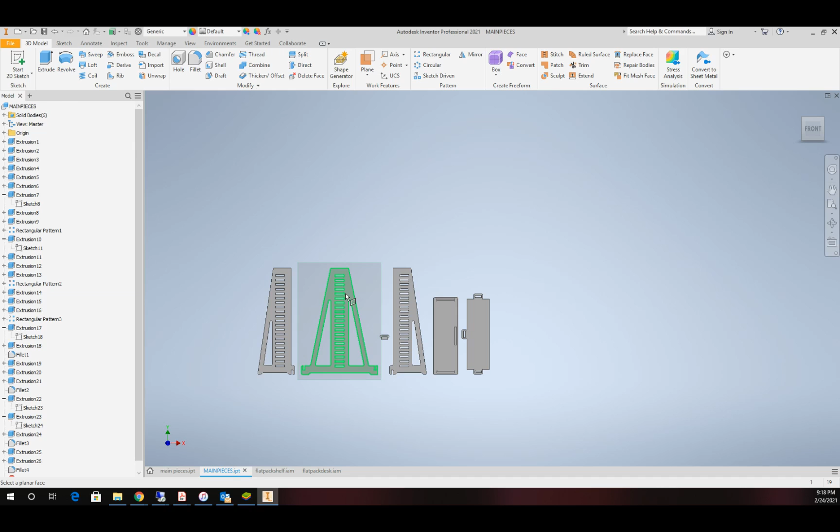An easy way to get this over into our machining software is to go ahead and take an offset plane, set it up a couple inches, and then we can start a sketch on that offset plane, and then project geometry of all our pieces.

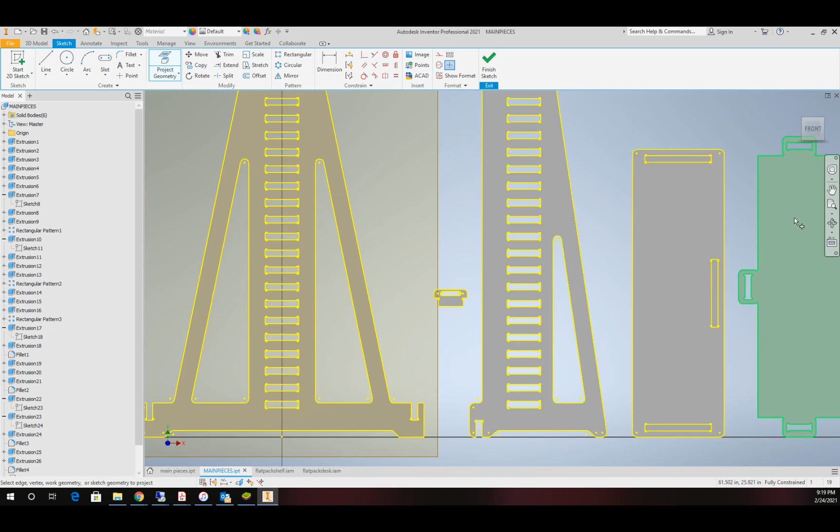Okay, and at the bottom of my list here I have that sketch, and I'll just export that sketch out as a DXF. Now I can bring that over into my routing software, my plasma software, my laser software, my water jet, whatever it might be, and go ahead and use it over there.

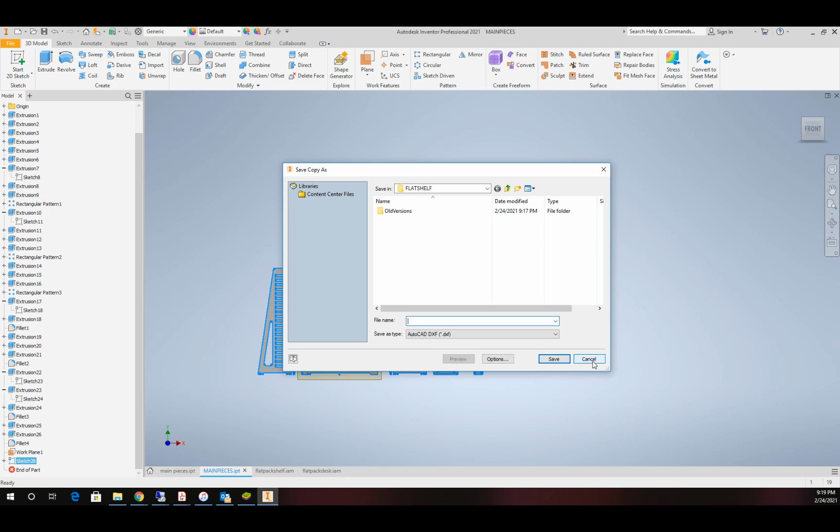This is great too because it's adaptive. If I go ahead and make any changes to the part files, that sketch will update. I just have to re-export it out to get it all finished up.

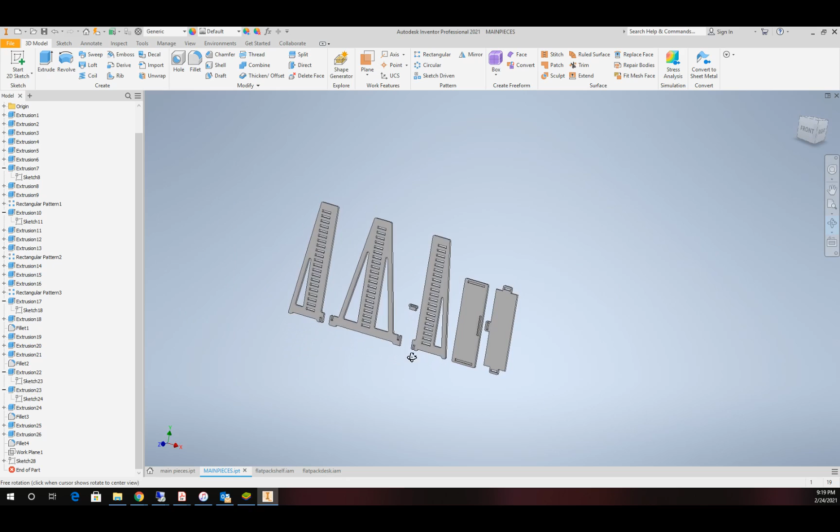I hope you enjoyed this video and you picked up some skills. Remember, just a little recap: we started off using some parameters and we set those up—my tool diameter, my material thickness, and my clearance.

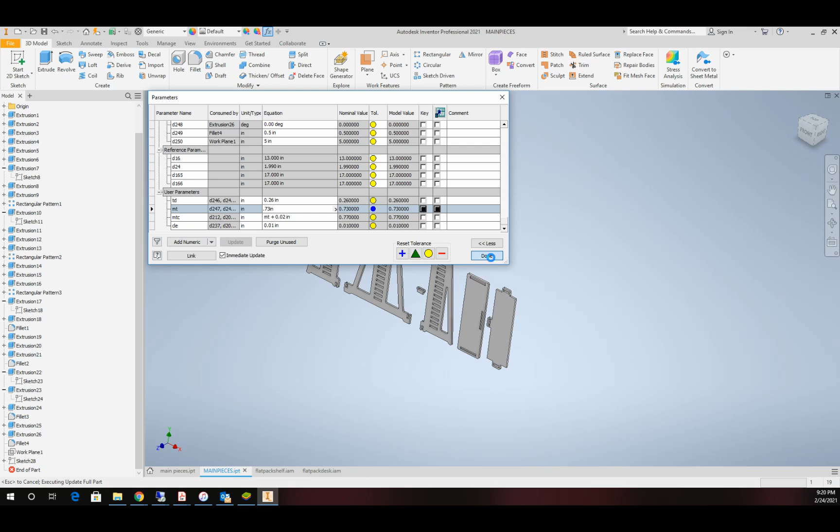So we'll just do a little change here. My material thickness all the way through is set to 0.75. I'll go ahead and set that to 0.73 and done. That should update everything throughout here and make the changes that are needed for that.

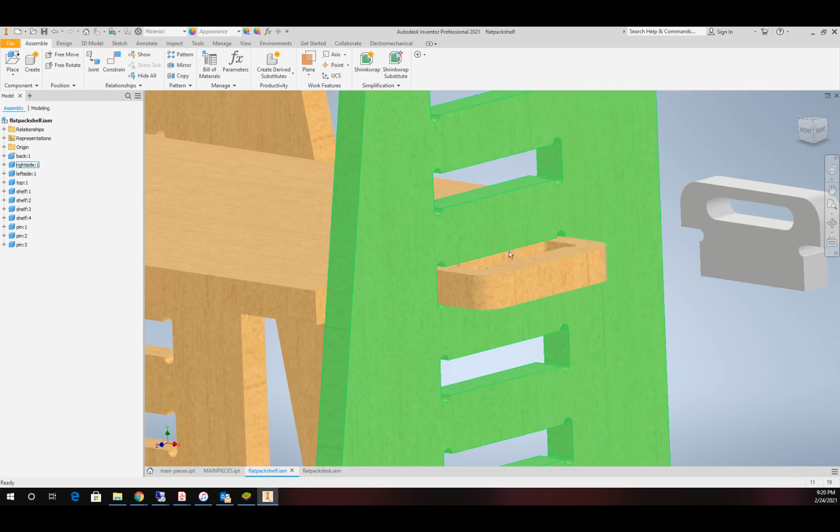Since I already made this sketch, these are now updated as well, so I would have to re-export that sketch out. But all I should have to do on my piece over here is hit the lightning bolt, and everything should update and be where it should be. Everything should be clean on my edges and perfect, as we were hoping.

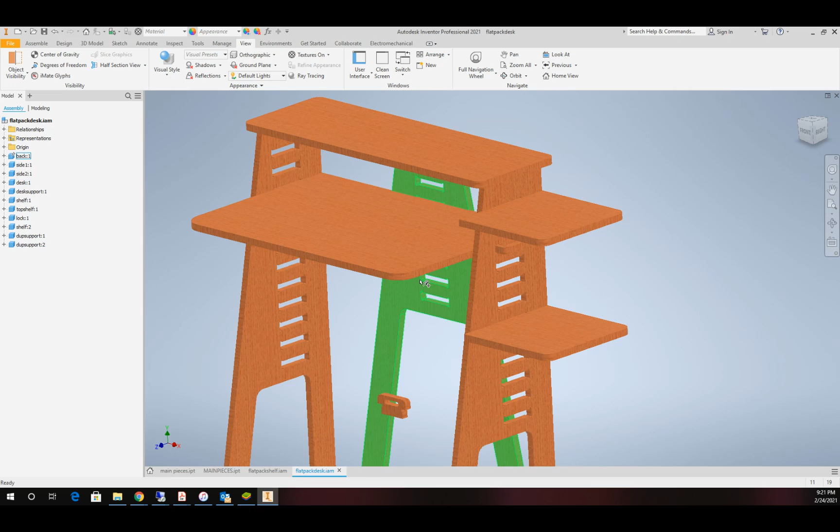Now, here's my shelf design. Just to show you one other thing before I let you guys go: I found this on the internet and decided to draw it up. It's an adjustable stand-up desk using the same technique. You can move your shelves around and your main desk up and down for a seating position. There's no glue or fasteners needed—everything's locked in place. So this is a fun little project.